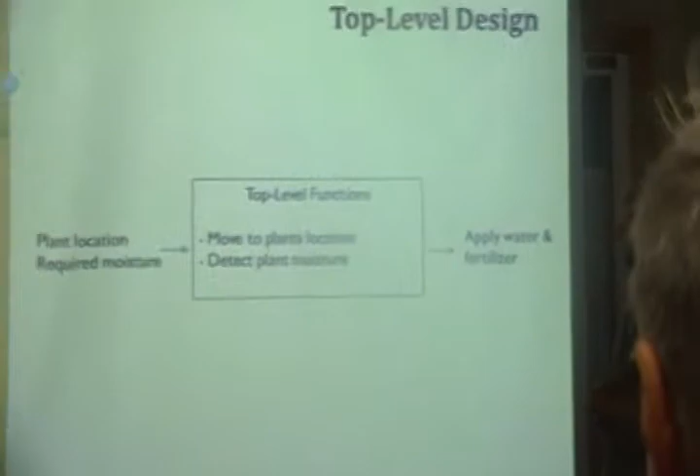This is the top-level design of our system. The user provides plant location and required moisture. The robot then moves to the plant location, detects plant moisture, and applies water and fertilizer as necessary.

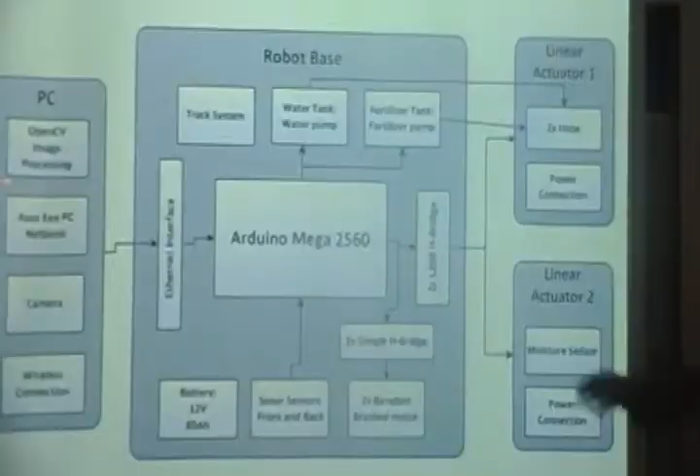This is the system architecture. Since we are using a robot that uses computer vision, we needed a camera, OpenCV software to do image processing, and a processor that can do fast enough real-time image processing. We chose the ASUS Eee PC netbook to do that. The ASUS is connected to the Arduino through an Ethernet shield.

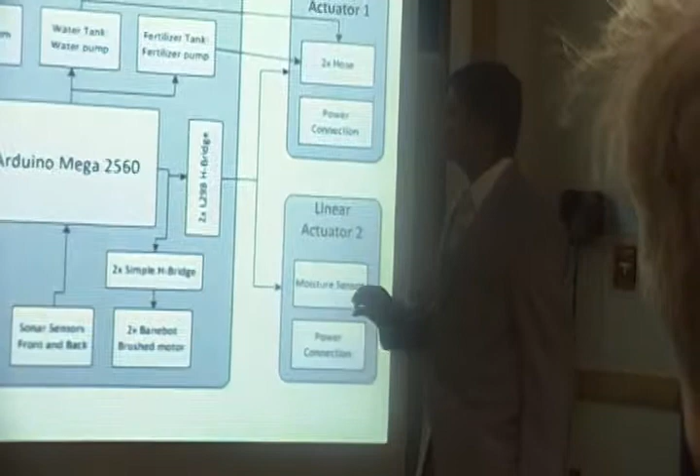The Arduino is like the core of our system; it's a microcontroller, and it controls all the motors for motion, water pumps and fertilizer pump to spray water and fertilizer. It also controls the sonar sensors located in the front and back of the robot, and it also controls the 2 linear actuators. The first linear actuator is used to pull the hoses in and out to spray water and fertilizer, while the other one is used to push the moisture sensor into the soil.

Now, since we have this, we needed a user interface for the user to interact with the robot. So we created a Java app that allowed the user to input data like moisture and plant location. Now we have the number of plants in the system and the moisture and plant location. So the next step is to move to the plant. In order to do so, we created custom labels and placed them on pots. Now Maitram will go over detecting labels and how to use them.

In order to detect objects and their location, we developed label detection software using the OpenCV library. This is the flow of image processing. The color image is captured from the camera and then run through color thresholding, edge detection, shape recognition, and size classification.

Next, we designed a label. We chose black and white because they have high contrast to enhance edge detection. Rectangle outside and triangles inside. We use binary encoding to describe different sizes, black for 1 and white for 0. The leftmost triangle is the most significant bit. We have the label; now we recognize it.

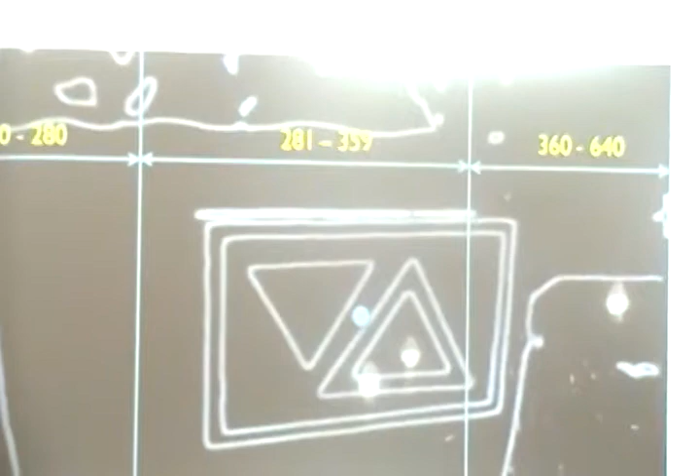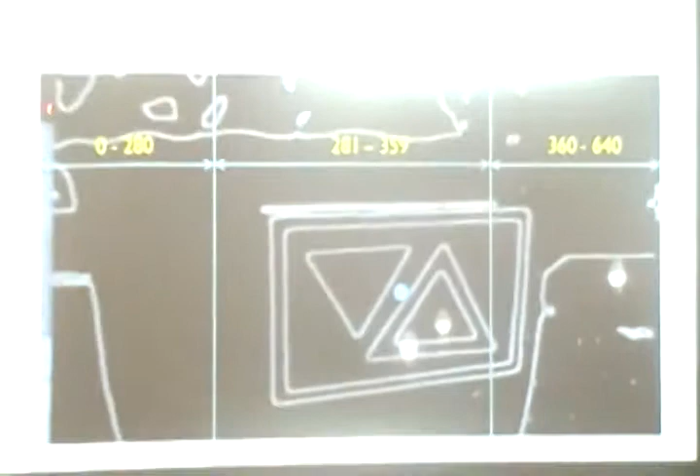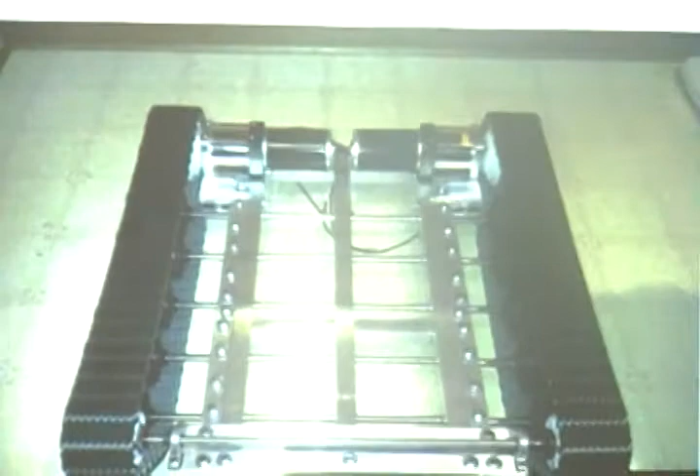And now the label tracking. By knowing the center of the label, we use the x-axis value to track the label. To move the robot, we try to keep the label in the center of the camera. If the x value is below 281, we move to the right. If the x value is above 359, we move to the left. Otherwise, we move forward.

Okay, so we know our plants, we know how to find them. We actually have to use something to move to them. So we had to construct a robot base.

Unfortunately, we couldn't buy one because of the requirements in the project. The weight and cost was not feasible. We started off with two 26-inch aluminum bars spaced 10 inches apart. Those are here to here.

There are 5 cross-sectional steel bars that connect the load supporting wheels. That's these 5 bars going that way, horizontal. And the load supporting wheels do 2 things. The first thing they do is distribute all of the weight on the track. The second thing they do is keep the track in place.

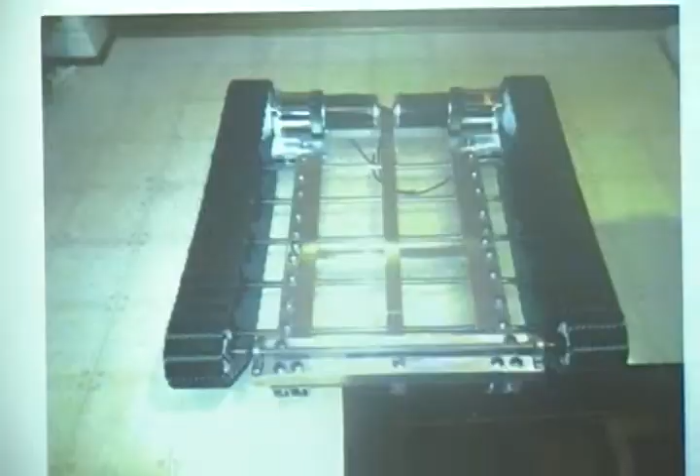When you turn a track system, it tries to jump off the wheels. There's tabs inside of the tracks the wheels go through to make sure that they're always in contact. You see, if you go to the back, there's 2 sprockets here, 2 sprockets here, and 2 sprockets there and there. They connect the entire thing together and create a stable platform.

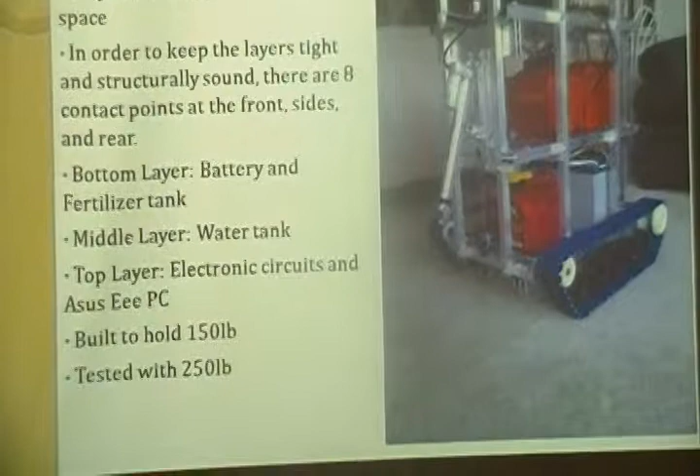Now, we have many components. We could either have built out and made the system very wide, or built up like we did. We built up. This allowed us to work in a grid-like pattern that you might find on a farm. So, we needed at least 3 layers. Each layer has 26 by 14 inches of usable space. In order to keep these layers tight and structurally sound, we had to connect them at 8 points at the front, sides, and rear, which you can see over there.

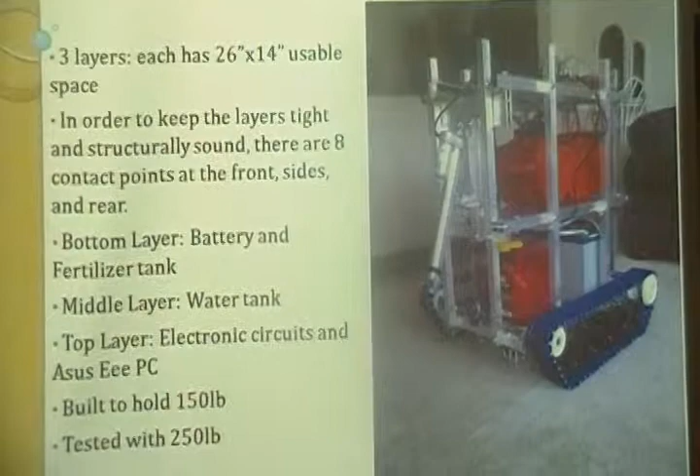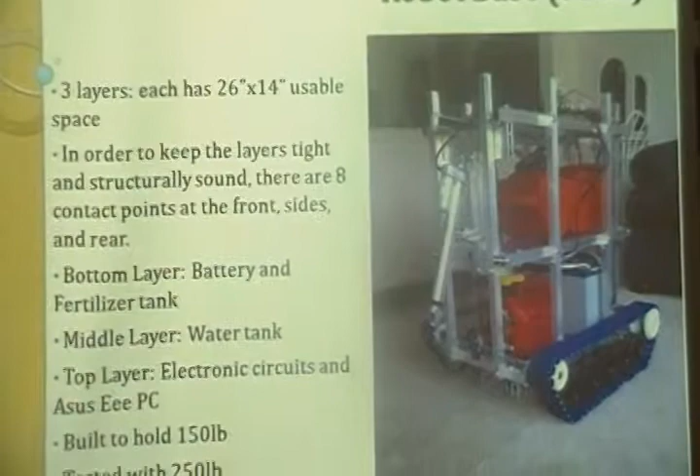On the bottom layer, we have our battery and fertilizer tank. The battery is the heaviest item. The second heaviest item is our water tank. We placed this in the middle because we wanted to be able to expand if the requirement came. Our requirement is 3 gallons, but we can hold up to 10 conveniently in that space.

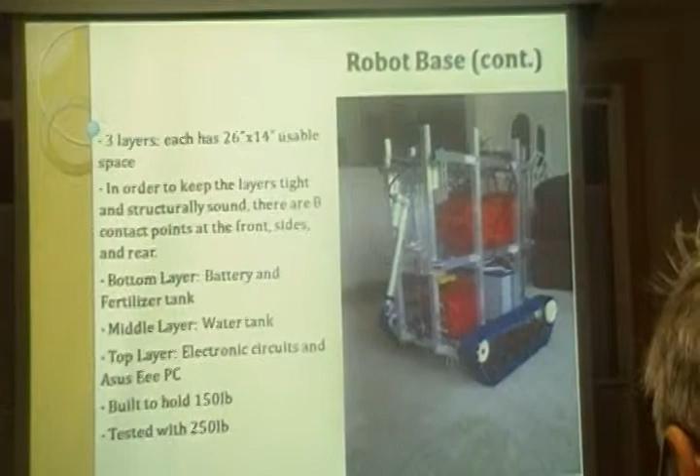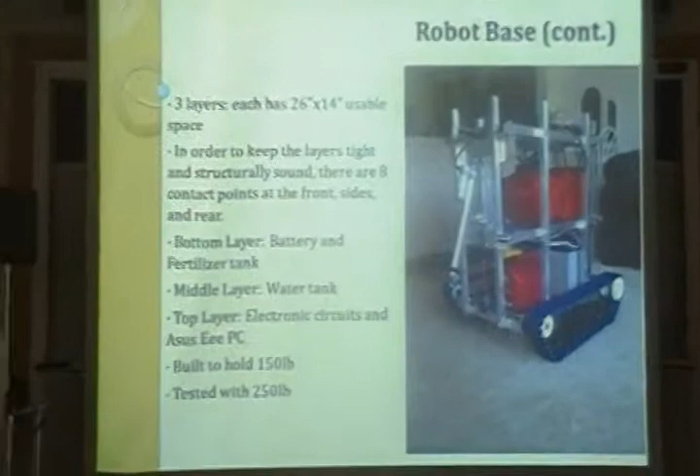Above all of this is the electronics. These were placed above to counteract any failure from our pumps, hoses, or containers. And we built this to hold 150 pounds, and successfully tested it with 250.

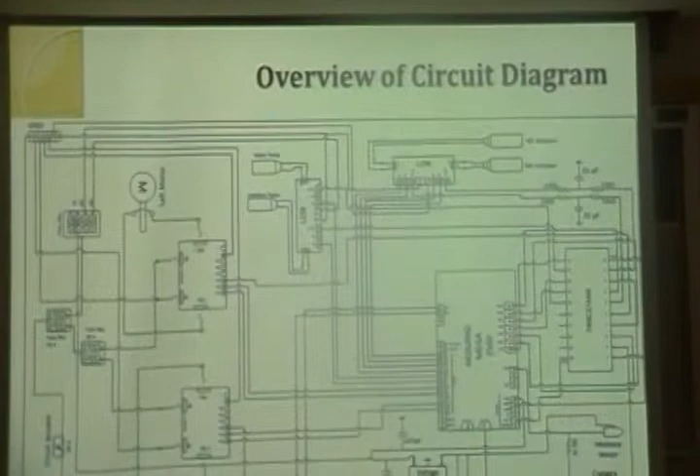This is our circuit diagram. You see the Arduino Mega 2560 is connected to our simple H bridges here for movement, H bridges to control our actuators and pumps. We have fuses and a circuit protector. But most importantly, because we have all of these components, we actually had to implement a buffer to move some of the current from sourcing from the microcontroller.

Now let's talk about how we move this thing. What's our algorithm? We first start. Then we check for a label if it's within the visible path of the robot. If we find it, we determine if we can move based on the output from our sonar sensor. If our sonar sensor says it's okay, there's nothing in front of it, we have a clear path, we move to the label. We continue this until the label size is an area of 70,000.

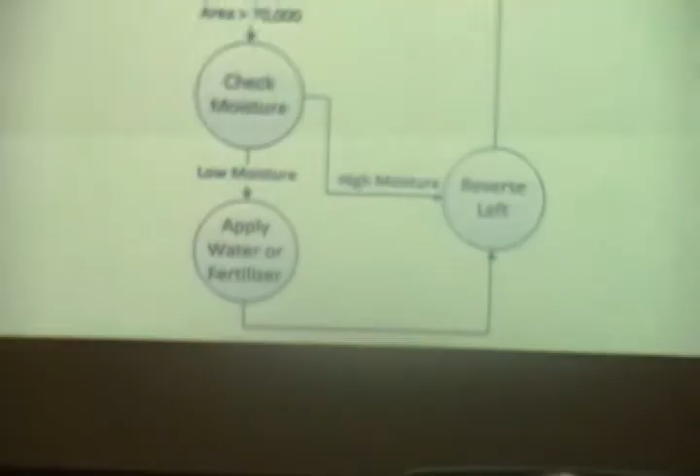Once we're there, we know we're at the plant. We check the moisture, which is this actuator right here, that will move down into the plant. We determine if it needs water or fertilizer based on that output, and then we reverse to the left and repeat the process. Now we're going to show you a video of this whole thing in action.

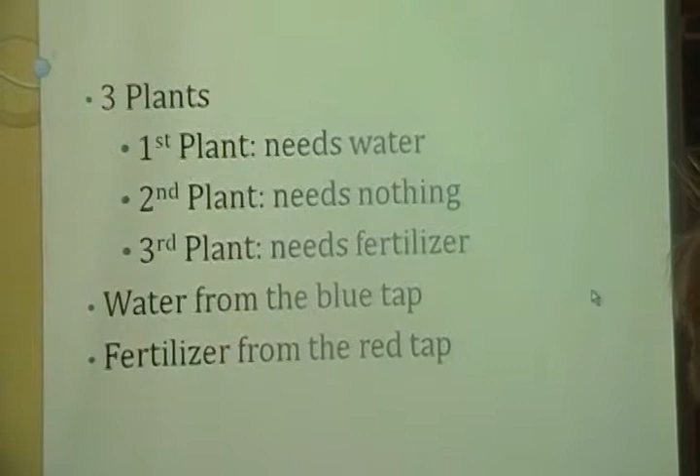You're going to see 3 plants. The first plant will need water, the second plant needs nothing, and the third plant needs fertilizer. As you can see in the front, the blue tap is water and the red tap is fertilizer. Those are the labels on the plants. This is live, real-time speed.

Moisture sensor going into the soil. You see this actuator coming out. Water's being applied. Actuator's going back. And now we reverse to the left, keeping the image still visible.

When the area of the image is sufficiently small, which is less than 1,000, we know we're far enough away and we look for the next label. We found the label, and now we're moving to it. That's what the robot sees.

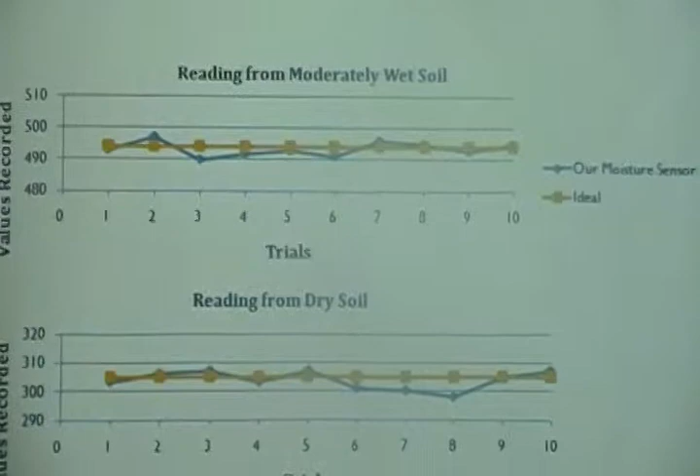Let's talk about tests. Most importantly, we felt that our accuracy in continuing to measure the same value from our moisture sensor was important. In moderately wet soil, we found an ideal measure to be 495. That number is the value given from an ADC on the microcontroller, which goes from 0 to 1023. We were able to be within 2 deviations of that over 10 trials.

For dry soil, we were slightly off with 3 deviations, and that makes sense. The moisture sensor works on the amount of conductivity. With less water, you have less conductivity, you have a bigger shift. But it's okay, it just means the plant needs water either way. In overly wet soil, we were fine, the same as wet soil.

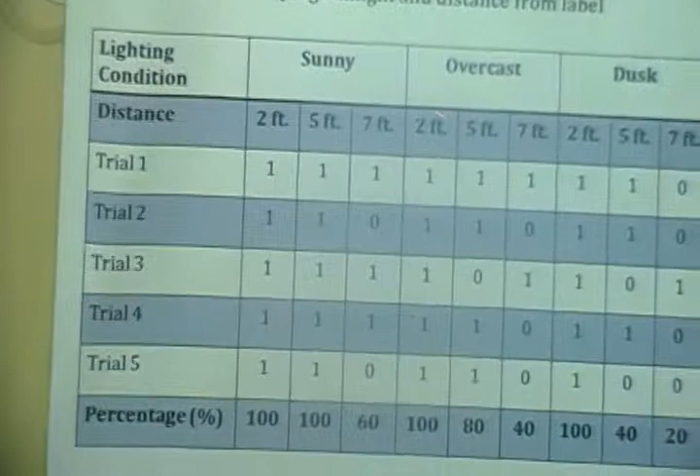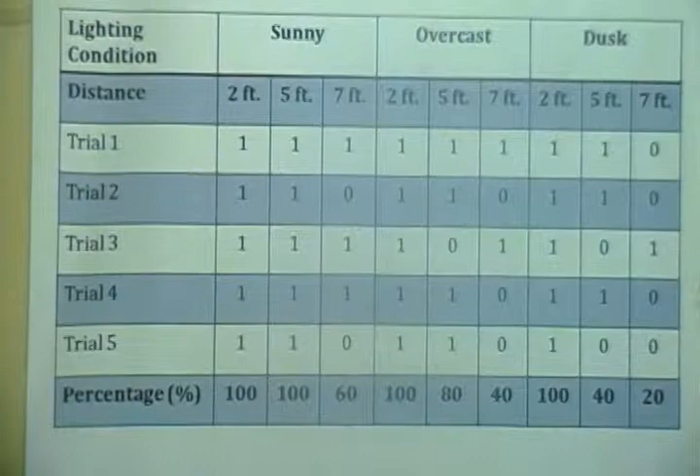Now let's talk about if we vary sunlight and distance, what happens. Sunny at 2 feet, overcast at 2 feet, and dusk at 2 feet, we have 100% over 5 trials of visually seeing the label. As we move back, sunny at 5 feet is 100%, overcast at 5 feet is 80%, and dusk is 40%. We start to see a pattern. If we lose our lighting condition, this becomes less effective.

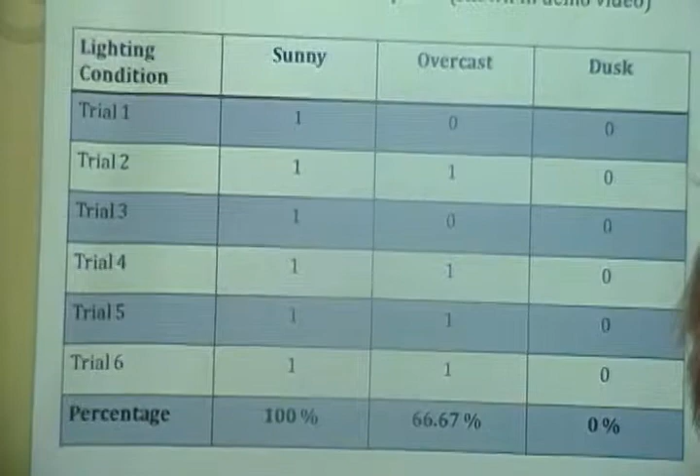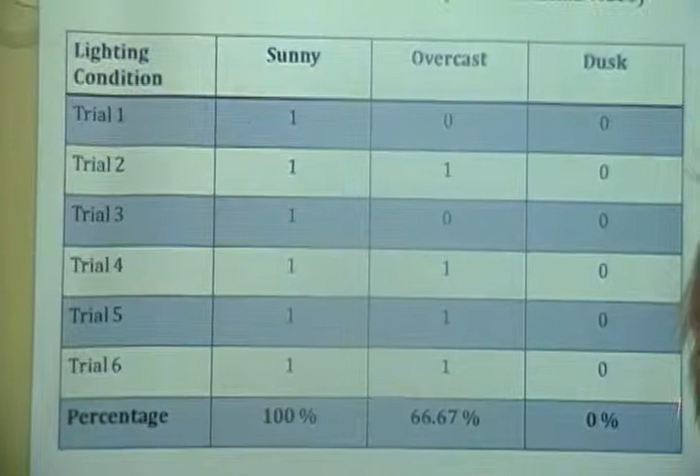So let's talk about an overall test, because that's the most important thing to go from start to finish. The video you saw was an overall test of just 3 plants. In sunny conditions, over 6 trials, we had 100% accuracy. In overcast conditions, over 6 trials, we had 2 failures, and we attribute this to 2 things. First being lighting. The second being the communication between our PC and Arduino, which Peter will talk about later in the future improvements.

As you can see, in dusk, we were not able to complete a full trial. And this is good news, actually. This tells us that we have an operating range. We know we can go after dawn and right before dusk, and we're fine.

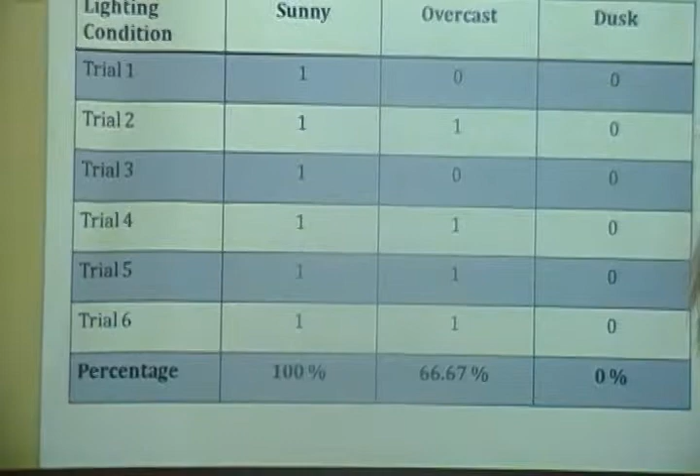Now Peter's going to talk about future improvements. Our label detection software needs 100% match to find a label. In the real world, we found out it's not feasible only in the ideal condition. So we would like our label detection software to allow 10% deviation for label matching, which will improve our overall system. We also would like to use interrupt-based communication between ASUS PC and Arduino. We also want to have a shaft encoder for our motor as a third feedback for movement.

The total cost for this project is $2,600. It's a little bit high because our project needs a weight requirement. In order to achieve that, we have to use a bigger motor with a gearbox, which draws a lot of current. So we've got to use a bigger battery, which adds to our weight and cost.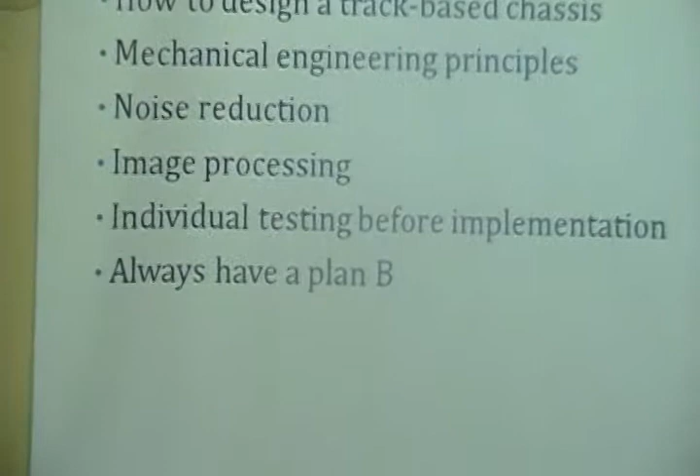While working on this project, we've learned a lot. Here's the key points. We learned how to work with steel and aluminum. We know how to design a track-based chassis. We had to deal with mechanical engineering principles. We did noise reduction and image processing. We have learned that it's very important to test an individual component before implementation, and to always have a plan B.